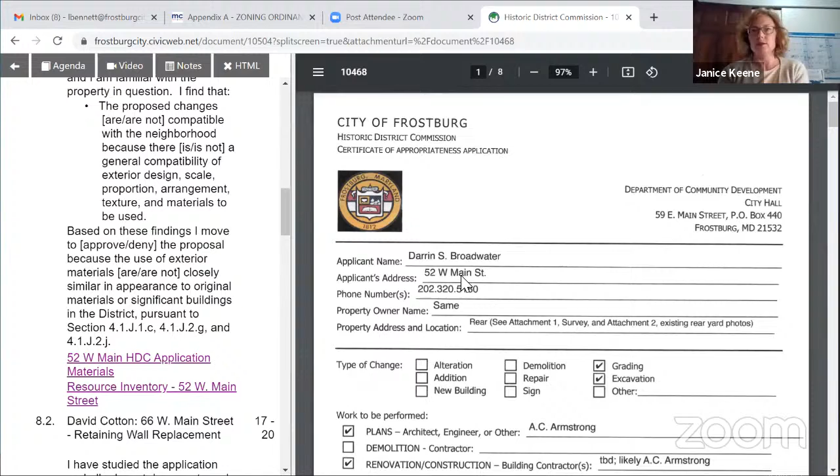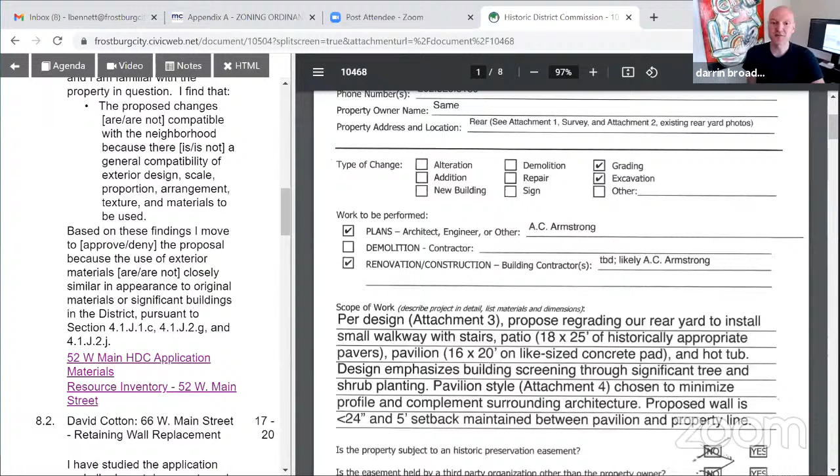Sure. This is my first HDC experience, so I actually didn't prepare anything beyond the package. But I'm happy to walk through and just kind of talk about what we'd like to do and why and how we'd like to do it.

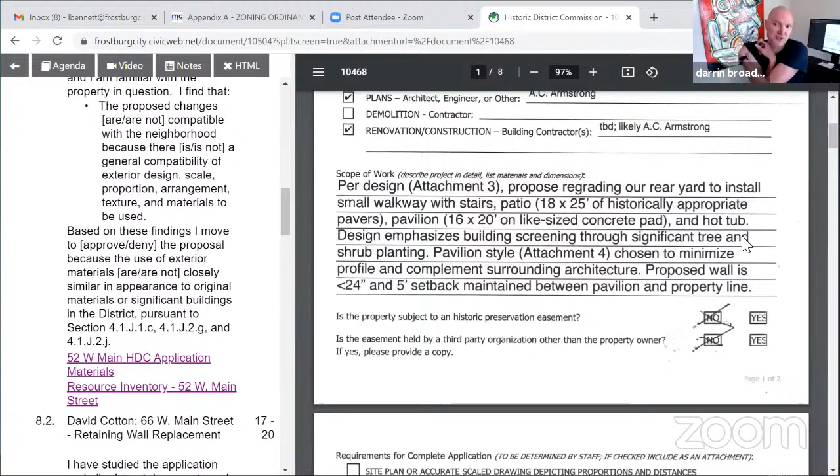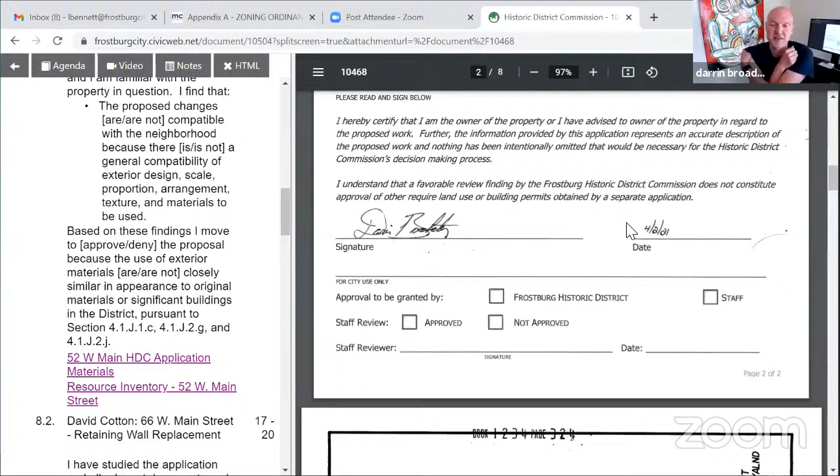So we bought this house, I think, about 3 years ago, and part of the selling point was it's got this great, nice, large backyard. It's fenced in for our dog, which has been lovely. The problem we've been having that we're trying to resolve is there are a couple. We have a lot of western sunlight that comes in the evening, which is great and warm and sunny on a day like this. The problem is it makes it kind of unusable in the summertime because there are a few mature trees, but they're not really in a place where we can benefit from the shade from them. So the intention here was to create a small patio kind of place where we could spend some time.

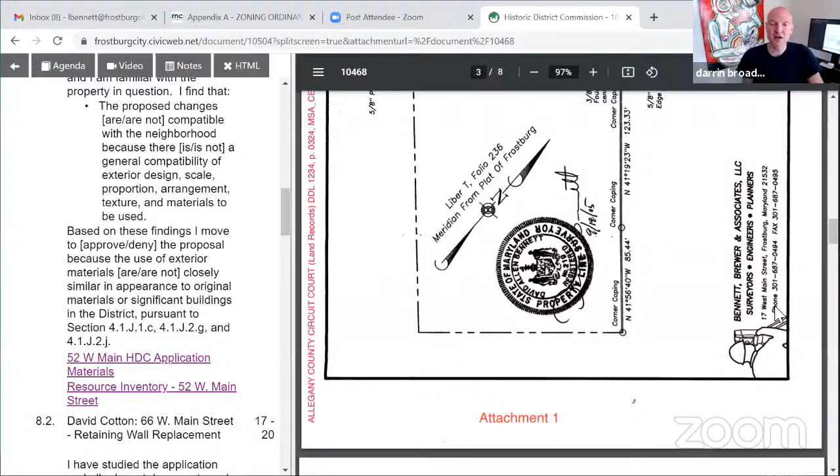In addition, we'd also like a kind of gazebo type area where we can get out of the sun when it's still out. And then, when it rains, we could be there too. Essentially, we want to do this in a way that is compatible and not overbearing for our neighbors.

We have neighbors on Mechanic Street, kind of right behind us - we're on Main Street, of course. Right behind us from Mechanic Street, we have neighbors whose houses are immediately on the road, so they look into our backyard. So we're hoping to get some screening here too, some screening trees.

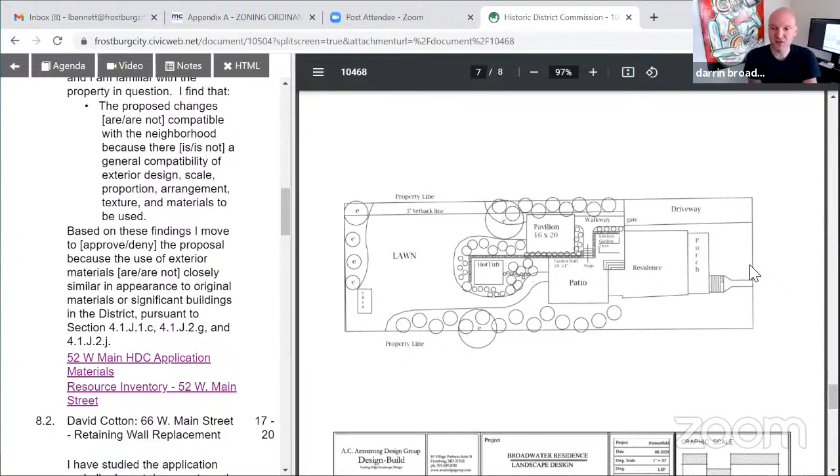I was a little intimidated by this process, so early on I brought in a designer to help us lay out our thoughts for what we're trying to do, and to get it down on paper and benefit from her take on it as well. That's included in the package, and that probably gives a much better idea of what we'd like to do than I could stand here and tell you in my words. So I'm happy to talk about any of the plans, if you have questions or elaborations you'd like on what we've submitted, but I think that's probably a better description than I'd be able to give you now.

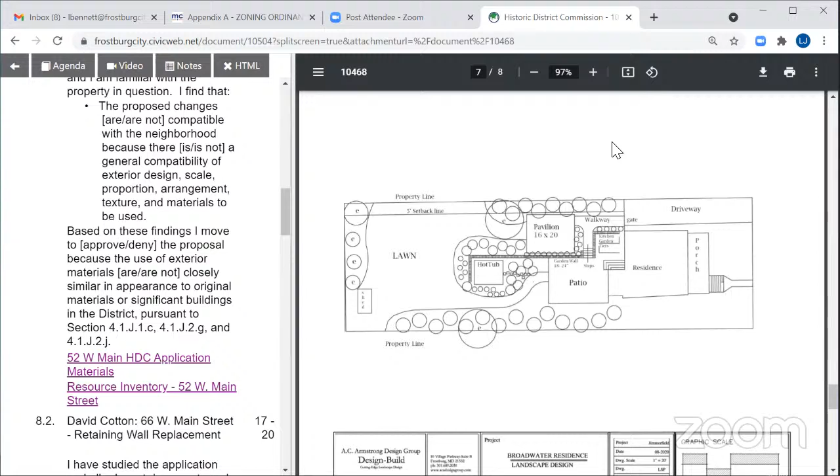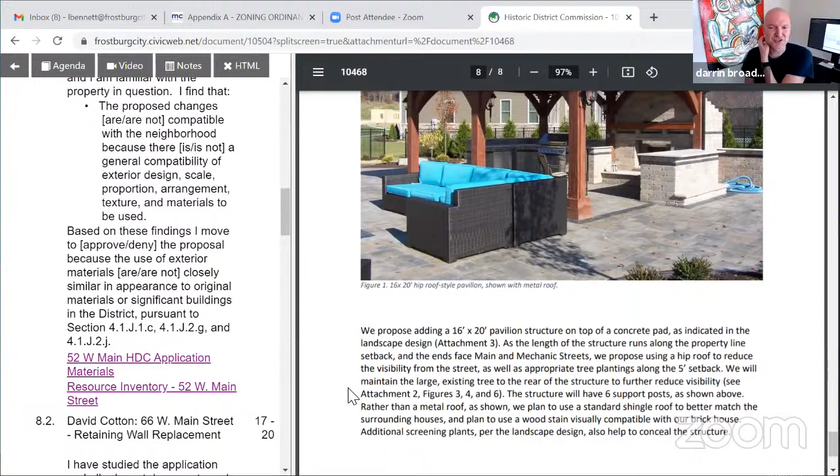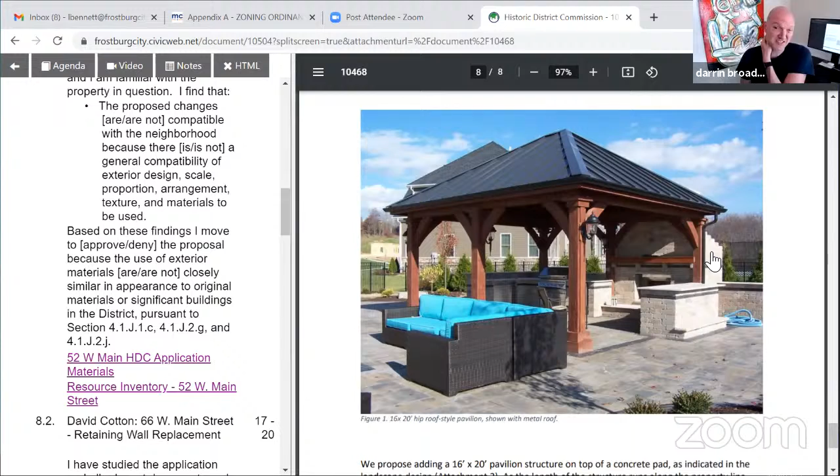The pavilion is essentially a model of the size that we're going for. As I note in the write-up, we'd like to do a shingle roof to be consistent with the house and the surrounding houses. The idea with the pavilion is we could just have one brought in, one that's compatible, so that's something we'll be ordering, and there is some customization there. Any of these design details are negotiable, so give some suggestions on what might be appropriate. Certainly open to hearing them.

So the question that I have is, the pavilion is not actually connected to the house in any way. Is that correct? That's correct.

As far as the patio, are there already stairs down off toward the residence, or would you have to build it? Yeah, there are two stairways in that plan. The stairs adjacent to the residence are existing currently. The steps between the patio and the walkway are proposed.

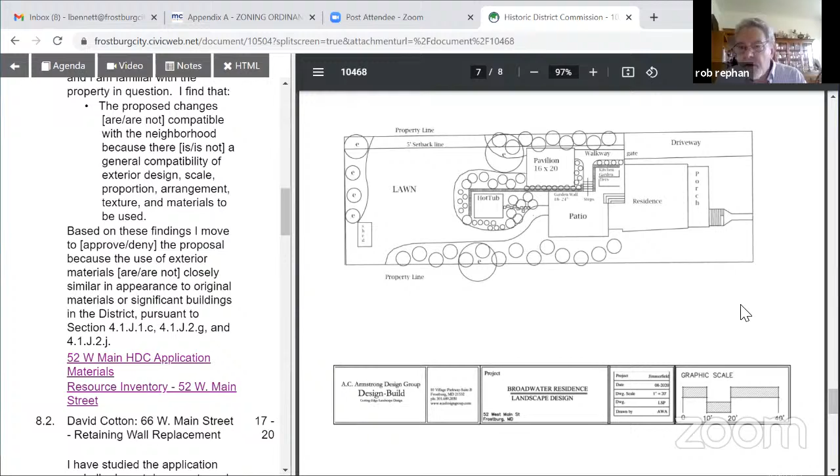And then where does that elevation come from for the walkway down to the patio? It's hard to tell in the plan, but there is a natural incline on the driveway adjacent to Sowers Funeral Home parking lot. That whole top of the page there, that property line is parking lot, and it's a little bit higher. You can kind of see the elevation right there.

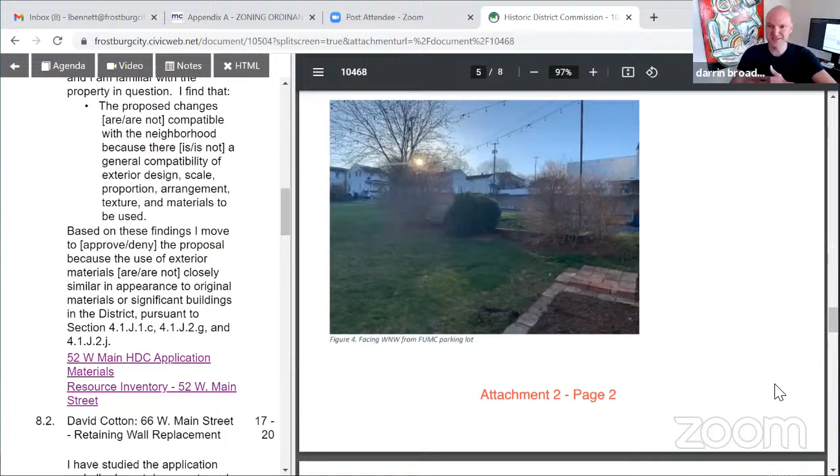So essentially we're trying to grade it so that both the lower and the upper part are level. But in doing that, we have to accommodate the incline and the grade. So the wall is splitting the difference, making a level upper part, a level lower part, and then the grade difference with the wall.

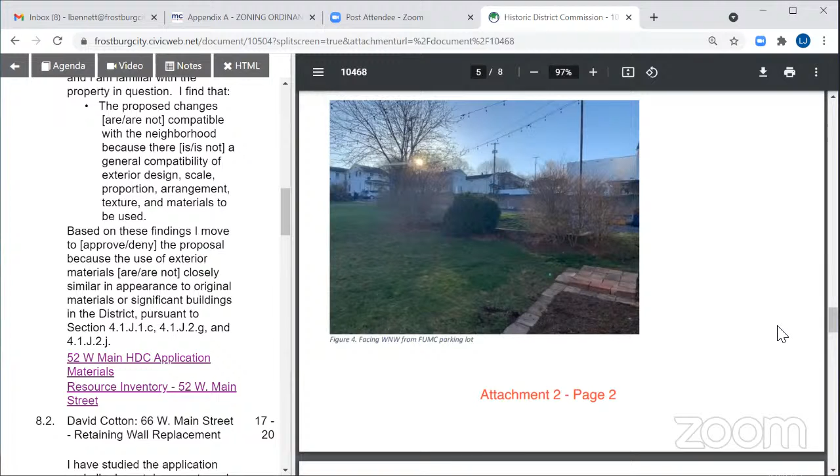Rob, if you take a look at figure 5, I think that's the steps you're referring to, right there. Oh okay, I think those are the ones. So it'd only be a step or two from that one.

Is there already a fence up around your property? Did you say that? There is a fence now, yes.

Let me see if I can find one of the pictures where you can see it best. In attachment 2, page 1, you can see the top of the fence right there. The front of the house has a bit of a wrought iron fence, but that's just things he's pieced together. The bulk of the yard is, I don't know, but it's like a wire fence with posts on it. And I think that was the fellow that had the house before us, Gary Ritchie, who you guys may have some experience with.

All right, are there any other questions from commissioners?

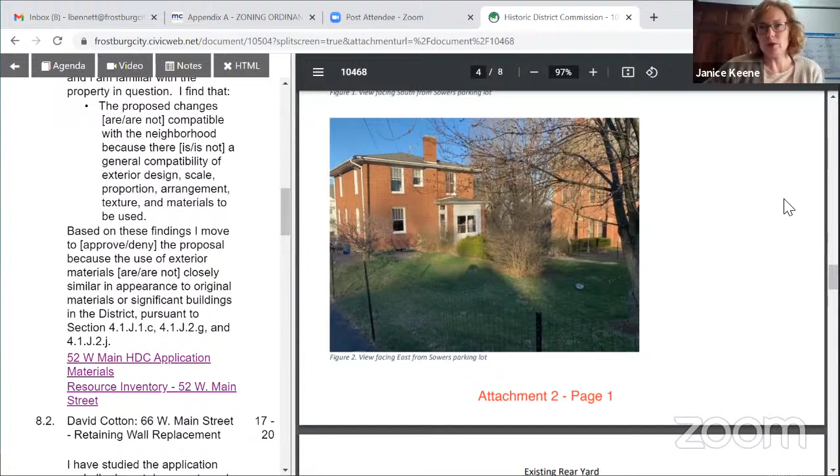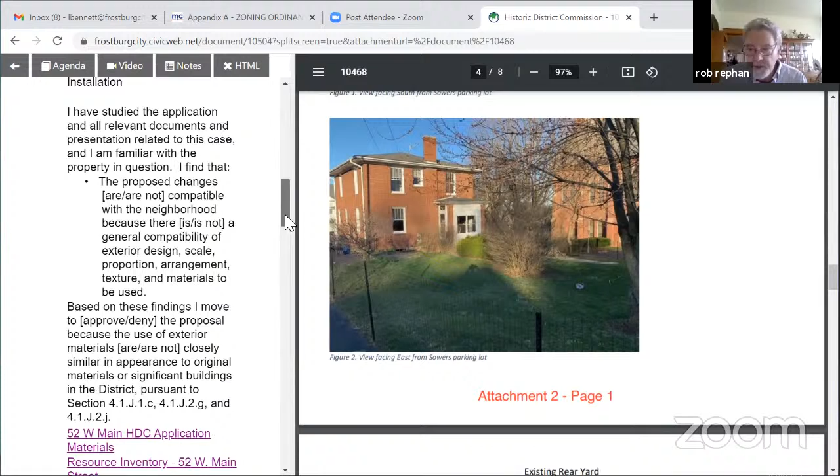Did you say you're going to keep that fence or replace it, the one up towards ours? I didn't say, but it stays. We're not looking to expand. I haven't gotten the estimate yet exactly, but I think we're in for enough money on the project as it stands. I'm not looking to expand the scope at all. I didn't see that, but I just thought maybe I missed it.

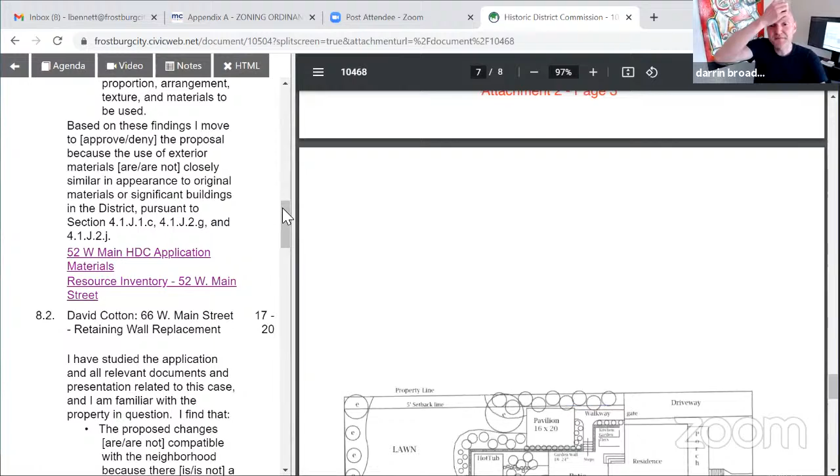What's your plan for privacy? Are you doing trees, shrubs? Yes, primarily shrubs. If you look back at the plan, we've got placeholders for the plants down, and I think they're within a ballpark estimate of what we ultimately intend to do. We've not gotten down to the level of a per-plant decision. But the ones with an E are existing, and the ones without an E would be new plants. So probably some form of shrub, bush, tree, something that looks nice that the landscaper recommends, hopefully a bit of a barrier.

All right, do we have any public questions or comments? No, Chair Hein, public comment was open until 4 p.m. today. And we haven't had any comment. All right, thank you.

All right, if there is no further discussion, can I have a motion, please?

This is Maureen Brewer. I'll make a motion. I have studied the application and all relevant documents and presentation related to this case, and I'm familiar with the property in question. I find that the proposed changes are compatible with the neighborhood because there's a general compatibility of exterior design, scale, proportion, arrangement, texture, and materials to be used. Based on these findings, I move to approve the proposal as use of exterior materials closely or similar in appearance to original materials or significant buildings in the district pursuant to section 4-1-J-1C and 4-1J2G and 4-1-J-2, that's J, the little J.

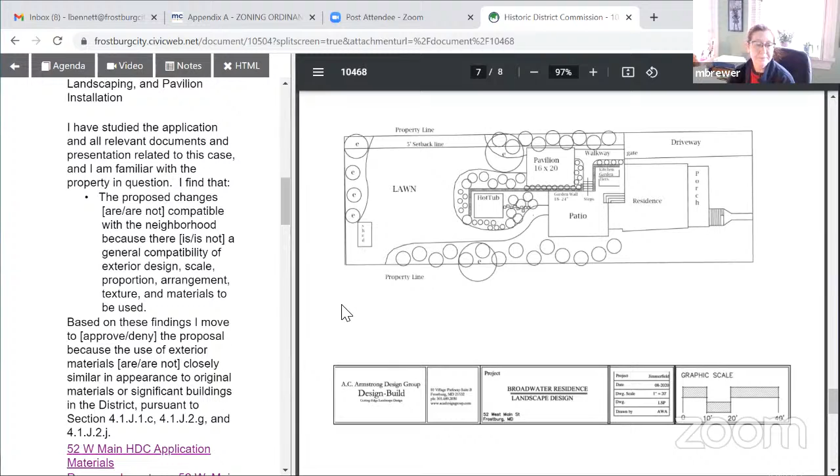I second that motion. Bill Determan.

All right, having a motion and a second. Is there any further discussion? All right, all in favor, please say aye. Aye, aye. All right, hearing none opposed, your project has passed.

Great. Thank you all for your time. I appreciate your help. Thank you. Thank you, good luck, good luck. Thank you very much, Mr. Broadwater. We'll be in touch.

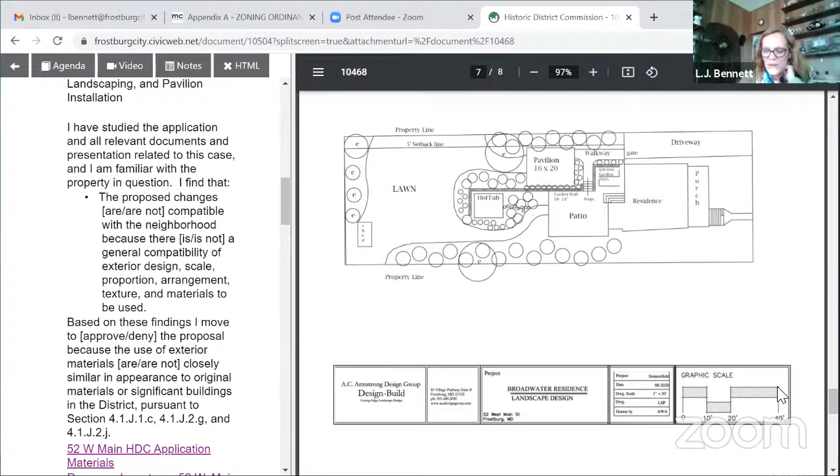All right, our next project is David Cotton, 66 West Main Street, retaining wall replacement.

Yeah, so hi, good evening, everyone. Hello, hi, I may have a little lag here. I don't know, but you're freezing and coming up. So hopefully this works flawlessly right now that I'm speaking.

I'm sure it won't, but anyway, this is the second major renovation we've probably attempted in the last 3 years. The first was the rebuilding of the porch, which we came to you for and did receive approval.

This is for the replacement of the existing wall, and it runs on the side of the house. It's approximately 70 feet long. 53 feet of that 70 foot long wall is 30 inches high, and 17 feet of it is 40 inches high. So we're right in the middle of having a wall that is fairly significant in order to hold the property landscaping back on the upper side of the property, which is 68 West Main.

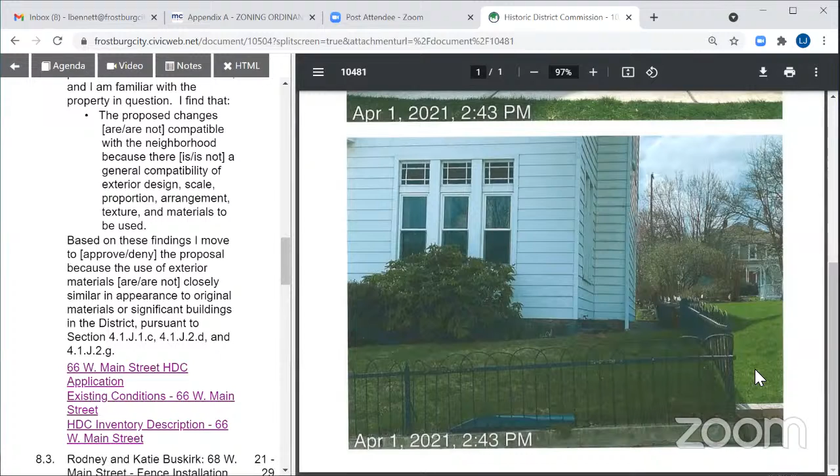So I'm still a little confused - does that mean that if they're deteriorated to a point, you will not replace them? No, Bill, the entire wrought iron fence will remain. There are 2 little pieces where they come together closer - if someone could maybe put the cursor over one in the front, where they come together closer and they cross.

Those two pieces way up at the very, very edge of the house near the cement - those two little tiny pieces are embedded in the concrete. Just don't know. I mean, the rest of the wall was full of rebar. The back wall fell 2 years ago, and all that rebar was totally deteriorated. So it just depends. We're not taking that wrought iron down - the wrought iron will stay. We just may lose those two little loopy sections at the one end, and that's it.

So just to be clear, the wall being replaced is along the side of the house or along the front as well? There's no wall on the front. It's all on the side. If I could share my screen, I have pictures.

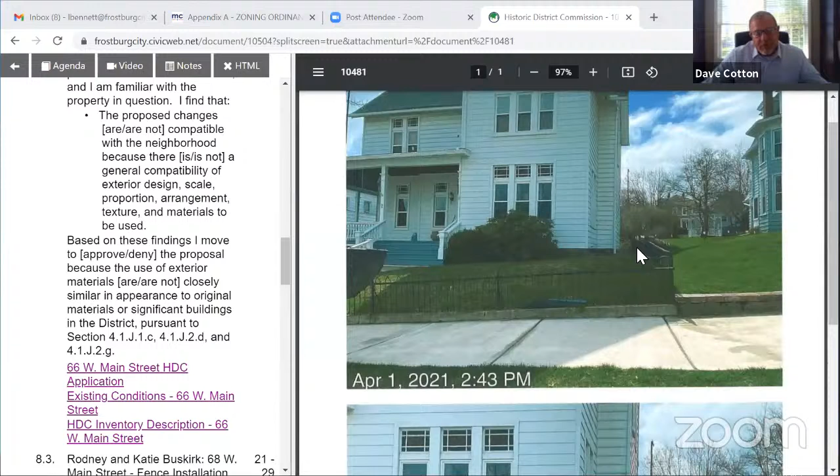This is the best close-up that shows it right here. Unfortunately, it is kind of in the shadow. This farther back view, you can see the bulk of the wall. It's not truly visible from Main Street. A corner of it is.

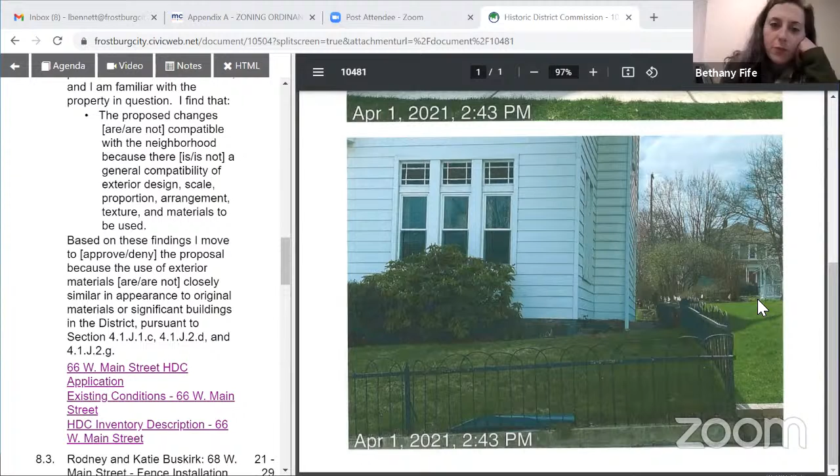The majority, you would have to actually stand in front of it to see it, because that walkway is only 3 feet wide and then it goes to 4.5. LJ, if you zoom that bottom photo at 200%, you can get a pretty good view of that section we're talking about right now.

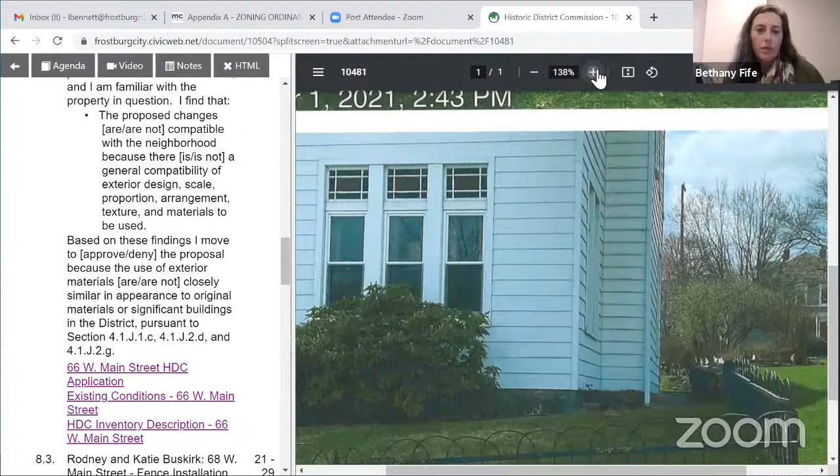Yeah, if we don't do something, it will fall. It's just a matter of whether it's concrete or block. Is that a little better view? Yeah, I think so.

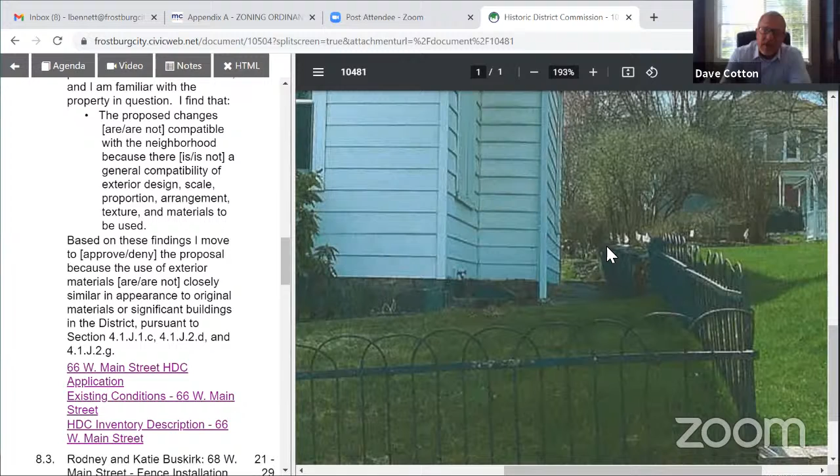Can you put the cursor where the wall starts, I mean the top of the wall? I can't tell. Right here. Oh, okay, it's up that high. Yeah, that's 30 inches, and then it goes back to 40. Got it.

All right commissioners, do you have any further questions for Mr. Cotton? Not for me, no. All right, did we have any public comment? No public comment was received.

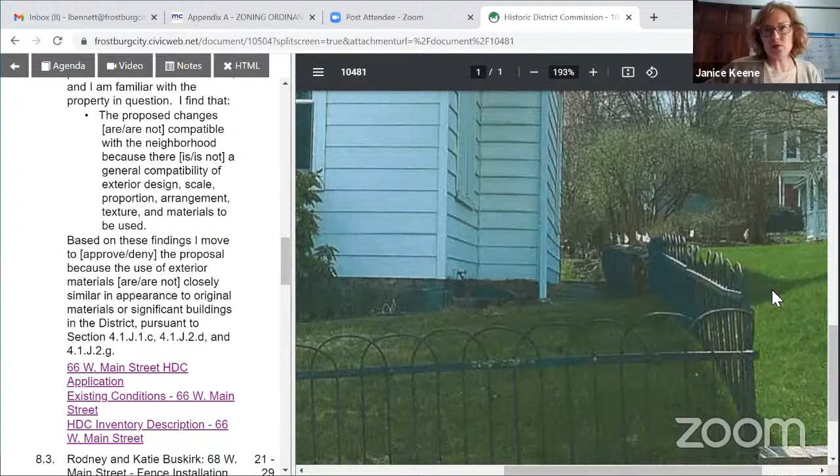All right commissioners, can I have a motion please? I'll make a motion, Rob Rephan. I studied the relevant application and documents and presentation related to the case, and I'm familiar with the property in question. I find the proposed changes are compatible with the neighborhood because there's a general compatibility of exterior design, scale, proportion, arrangement, texture, and materials to be used. Based on these findings, I move to approve the proposal because the materials are similar to the existing, pursuant to section 4.1.J.1.C, 4.1.J.2.D, and 4.1.J.2.G.

Maureen, I'll second it. All right, having a motion and a second, all in favor please say aye. Aye. Hearing none opposed, motion passes.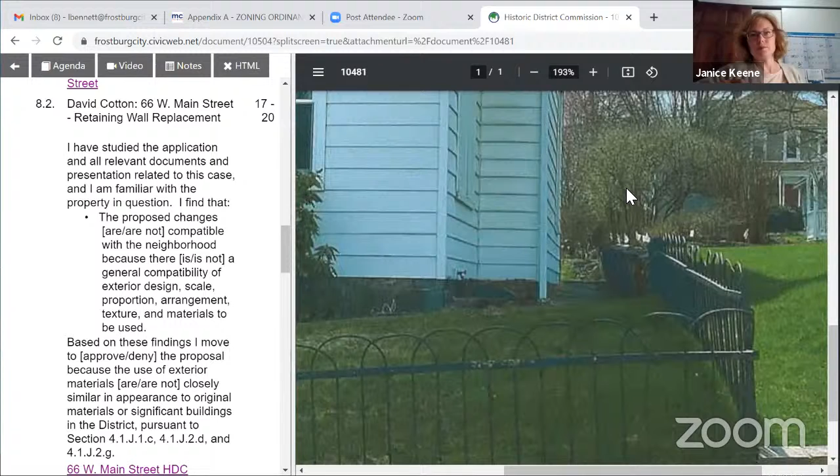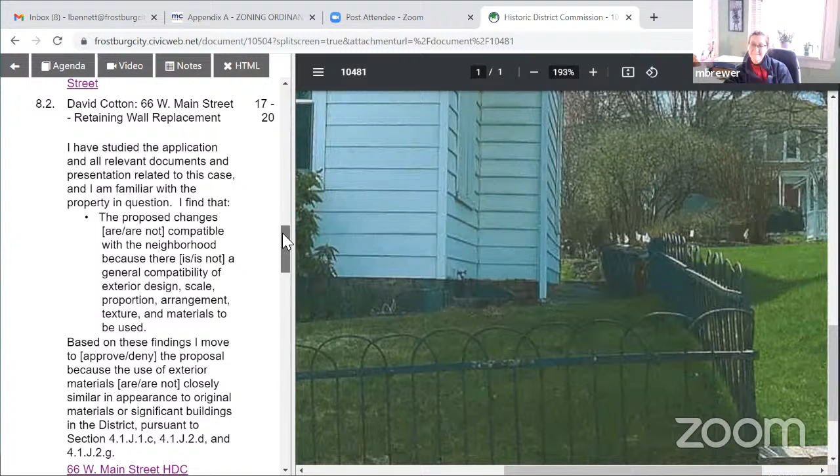All right, our next presentation is Rodney and Katie Buskirk, 68 West Main Street, fence installation.

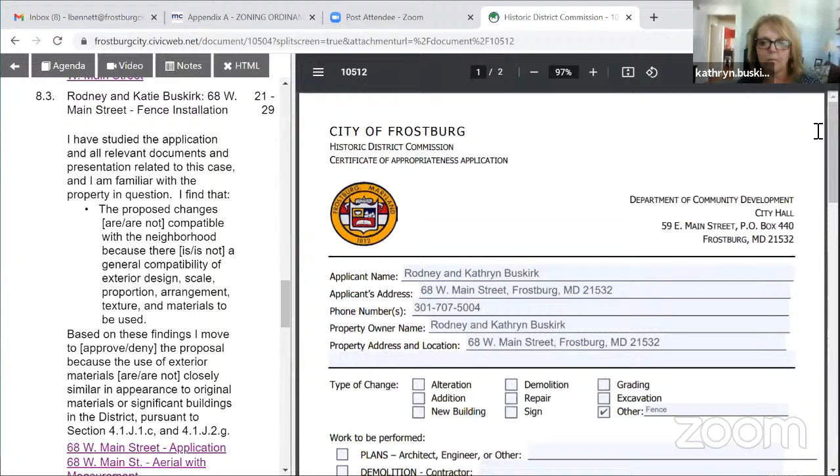Good evening everyone, can you hear me? Okay, yes, thank you. We are proposing the installation of a fence that will go across our property between our house and the house next door, 66. Attached are the construction design pictures for the fence. It is vinyl, only 4 feet, a picket style that is tongue and groove put together with posts and supporting posts across the top and bottom. We are also adding a gate.

We primarily need it for safety. We have grandchildren now that are out toddling around the yard, and we also have pets, so having a barrier there with the traffic on Main Street has become essential.

In addition, one picture that was inserted was an aerial view with measurement. The actual fence is back a little further than that, which is recording at 64 feet. When we hand measured it, it was a minimum of 75, from the edge of the curb, but give or take 5 feet, so it could be 75 to 80 feet. So it would be the backyard.

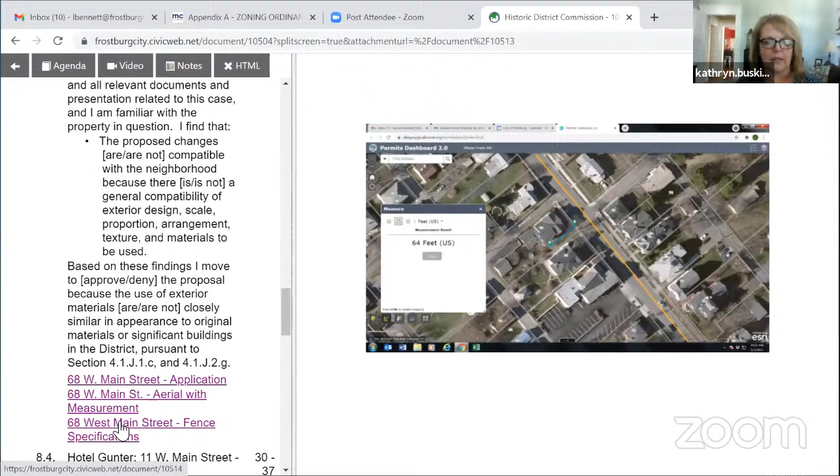There is a partial fence there now. The fence we're creating, which can be seen in a picture drawn in under the fence specs further down, would take it across and then in an L shape, follow the line on our property line and back off of the property next door who are fixing their wall and their back drainage. So it would be offset off the property line for that.

There's a tree, a larger tree and a smaller shrub tree that you can see. They would be in front of the fence. The fence would be behind that tree.

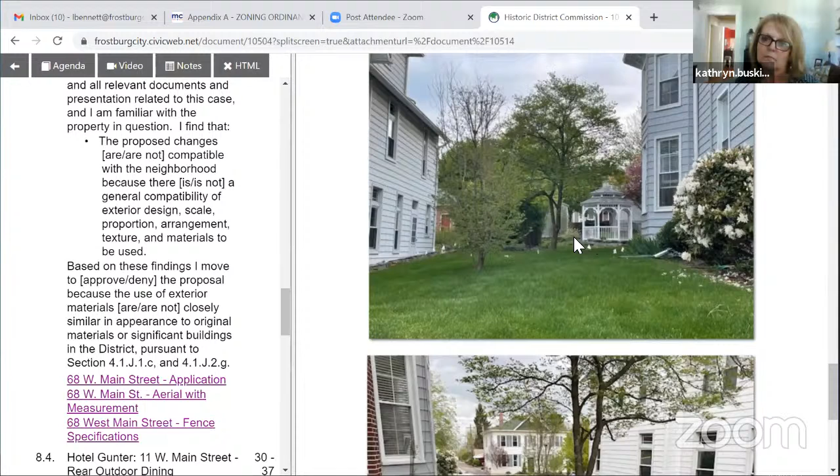Katie, you said 4 feet high? Yes, 4 feet.

Is there any kind of fence in the back that goes along Mechanic Street? Currently there is, and it's 4 feet. And there's a fence along alley 55 that is also 4 feet, sitting on top of a retaining wall, because the elevation of alley 55 is higher than the yard. That's just west of your house? Yes, that's alley 55.

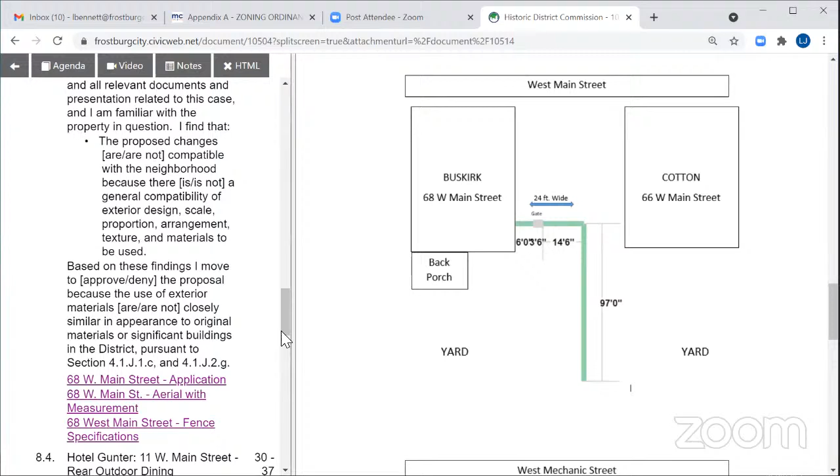All right commissioners, do we have any further questions? Not for me.

Did we have any public comment, LJ? Fortunately we did not. Public comment was open until 4 p.m. today, and we have not received any comment on this application.

All right commissioners, do I have someone ready to make a motion? Bill Determan, I will make the motion. I have studied the application and all relevant documents and presentations related to this case. I am familiar with the property in question. I find that the proposed changes are compatible with the neighborhood due to the general compatibility of the exterior design, scale, proportions, and arrangements. Based on these findings, I move to approve the proposal because the exterior materials used are closely similar in appearance to the original materials of a significant building in the district, pursuant to section 4.1.J.1.c and 4.1.J.2.g.

This is Maureen Brewer, I'll second that. Sorry about that, guys, I don't know what happened, I lost power there for a minute. It's okay, Mrs. Buskirk. Just to recap, Mr. Determan made a motion to approve the application, and Mrs. Brewer seconded that motion for a vote. Okay, thank you. Sure, understand these things happen.

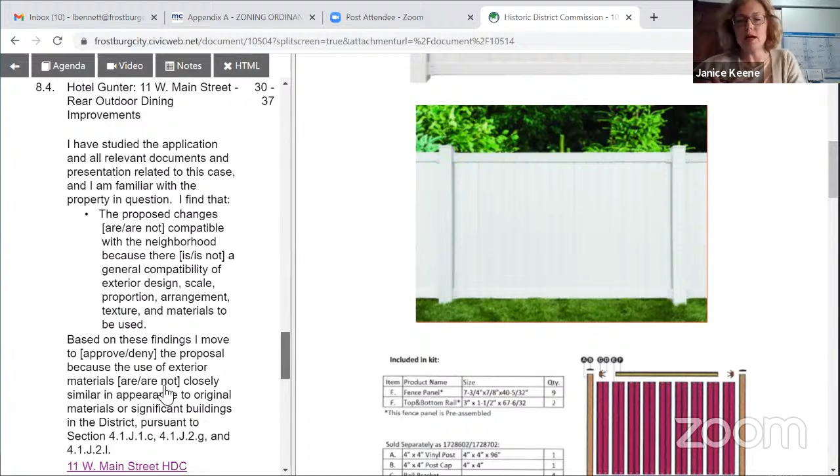All right, our next project is the Hotel Gunter, 11 West Main Street, rear outdoor dining improvements.

Last year we rented a tent and turned one of our parking lots into an outdoor dining area. This year we thought we'd do something a little more permanent. We're currently replacing the paving that was deteriorating with concrete, and we would like to build a pergola above that. It'll measure approximately 35 feet by 70 feet, attached to the existing building out back that currently houses our winery, brewery and distillery. It'll have a metal roof, lighting underneath, and be set up similar to last year with the tent there.

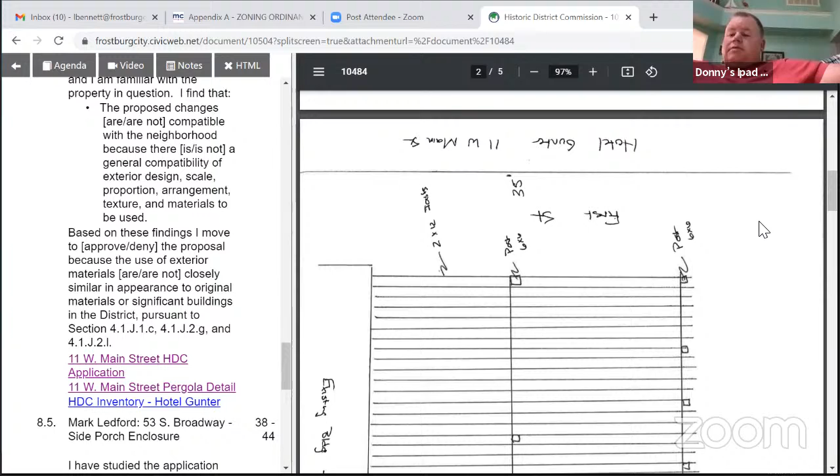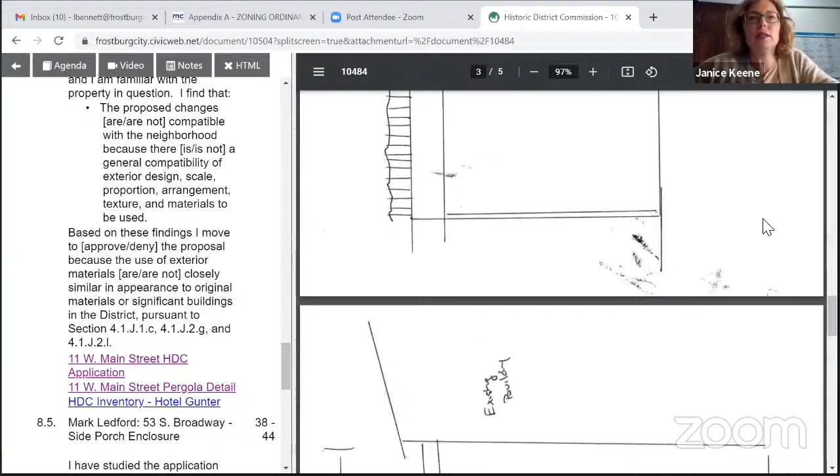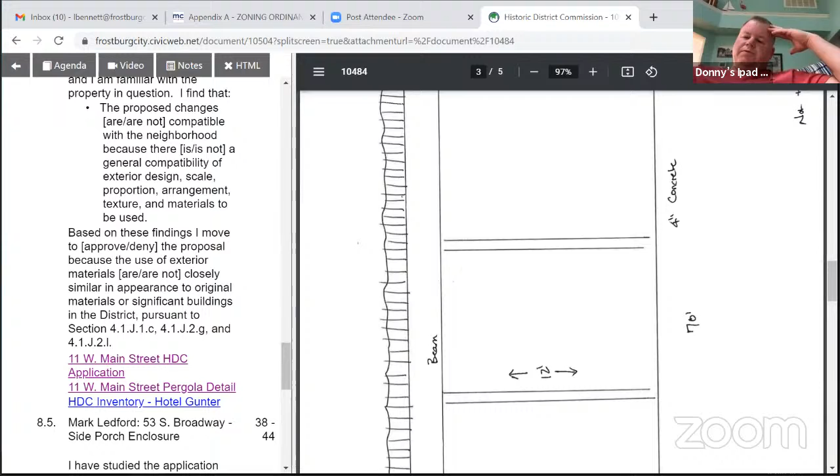So the drawing we're looking at currently, is that for the concrete you were referring to? Yes, that's the bottom, a cross section showing the concrete with a couple posts going up. You're looking at it sideways, that's the issue. To the left of that photo would be where the roof line is with the beam. There'll be several posts across there to support the beam.

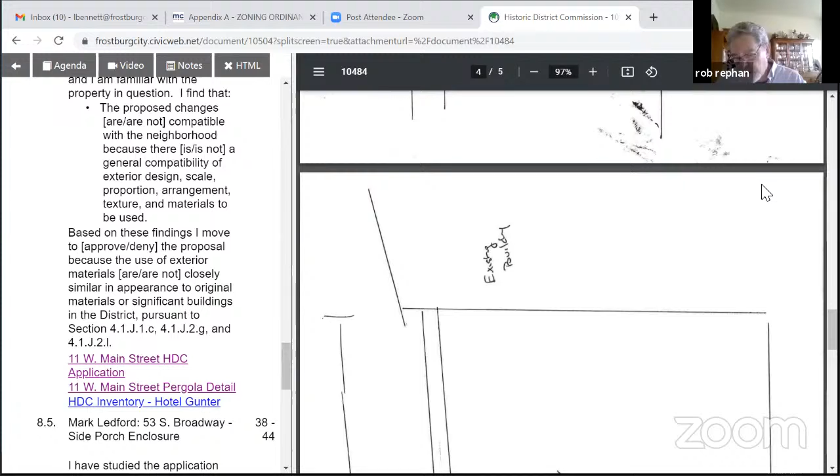Will the pergola run the whole length of that building then? Yeah, all but like 2 feet. So it'll cover that smaller door closer to the alley. They'll cover all the doors, the garage doors and everything. It'll be above them.

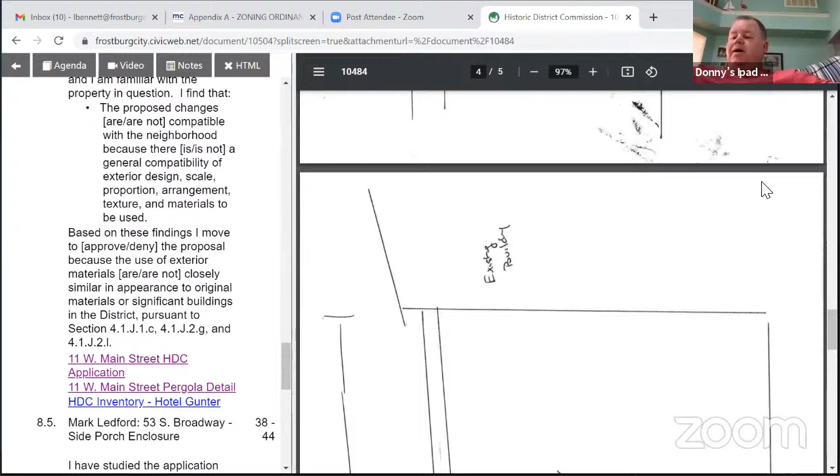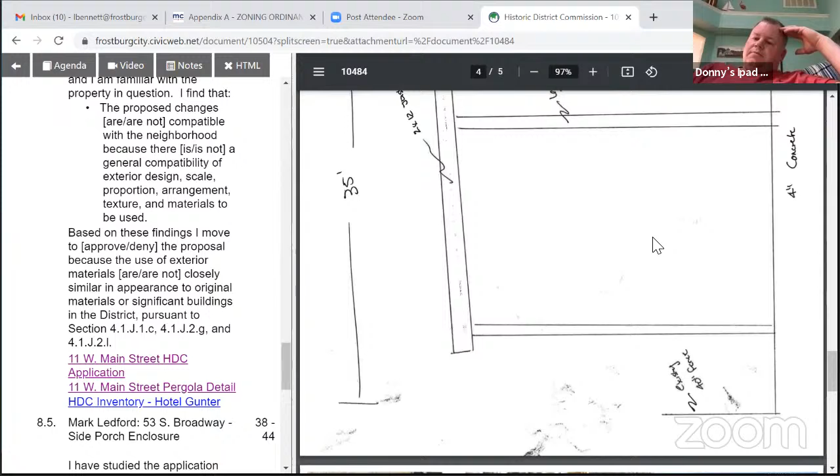Is the pergola going to be made of wood? Yes, it'll have a metal roof. We'd like to do galvanized if we can find it.

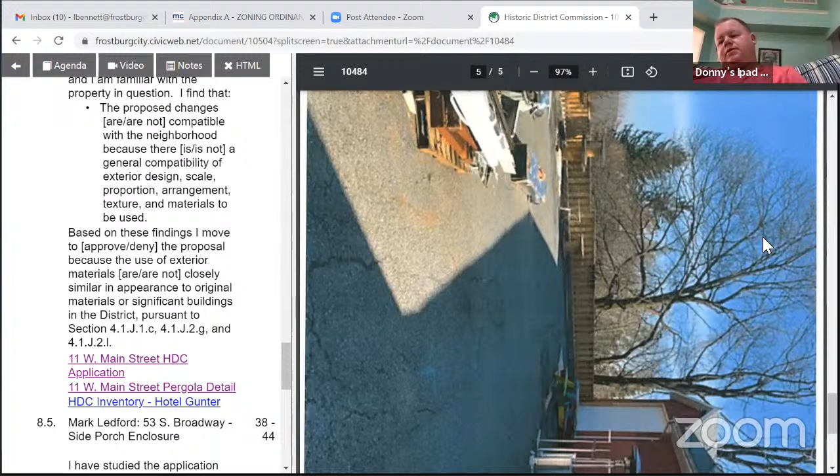Construction materials right now are pretty hard to come by. Last year we had a fence around the whole thing, and that fence will still stay there. It's down right now, but it'll be built back like that. The roof line will come out right underneath the roof line you can kind of see down a bit, LJ, right there.

And you said it would be 35 feet out from the building? Yeah, approximately. Will that be about where the other fence was then? Yeah, it'll cover the whole paved area.

So is the metal roof going to be a flat roof? It'll be pitched slightly, enough for runoff, like a 2-12 pitch probably, or a 3-12. It goes from the building - we have about 11 feet, and then it'll go down to probably 9 feet at the far end.

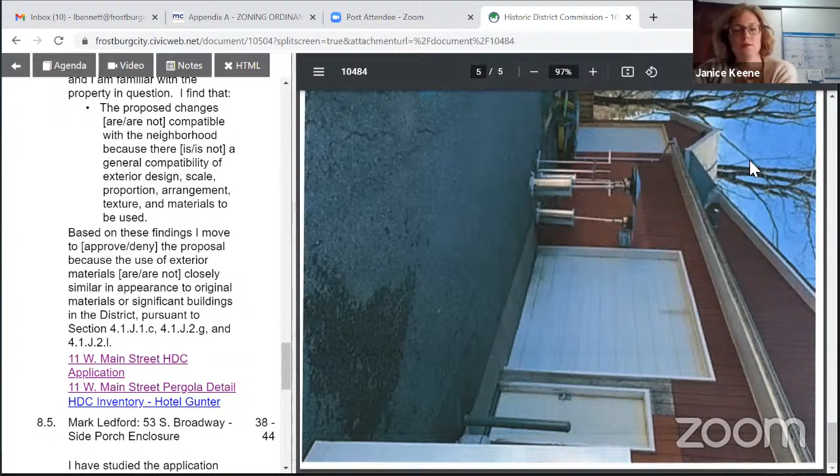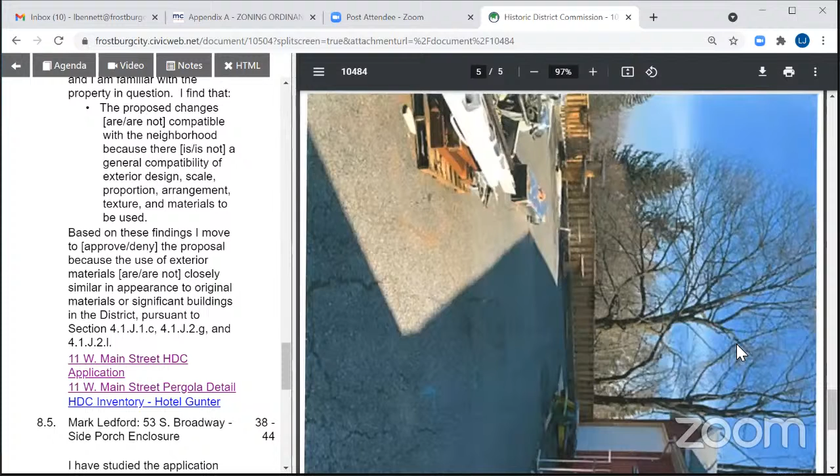Hey Bill, you can see in the drawing right above this picture how the roof is going to look. Oh, I see it, yeah, I didn't see it before. Thanks, Maureen. Oh yes, okay.

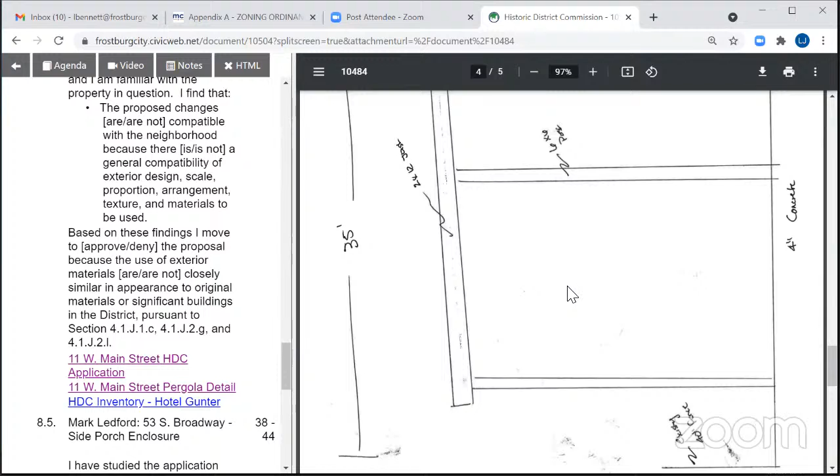All right commissioners, do we have any other comments or questions? Not for me. All right LJ, did we have any public comment? No chair, we had no public comment for this application.

All right commissioners, can I have a motion please? This is Maureen Brewer, I'll make a motion. I have studied the application and all relevant documents and presentation related to this case, and I'm familiar with the property in question. I find that the proposed changes are compatible with the neighborhood because there is a general compatibility of exterior design, scale, proportion, arrangement, texture, and materials to be used. Based on these findings, I move to approve the proposal because the use of exterior materials are closely similar in appearance to original materials or significant buildings in the district, pursuant to section 4-1-J-1C, 4-1-J-2-G, and 4-1-J-2-L.

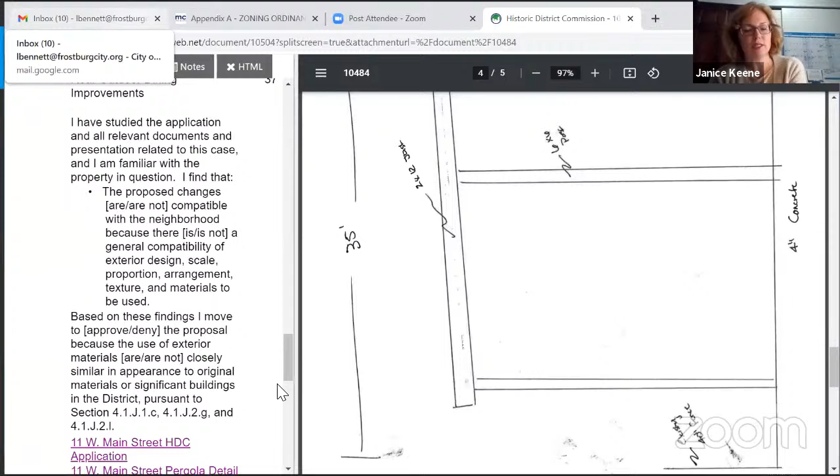All right, our next presentation is Mark Ledford, 53 South Broadway, side porch enclosure. Good evening, can everyone hear me okay? Yes, yes, yes.

I'm proposing putting an addition on the side porch of the 53 Broadway house. Currently there's a porch there that doesn't really fit with my plans. It's a rental property, and I'm looking to put a bedroom in there. It'd be an 8 by 12, and it would basically fall right underneath where there's an open area, the porch is.

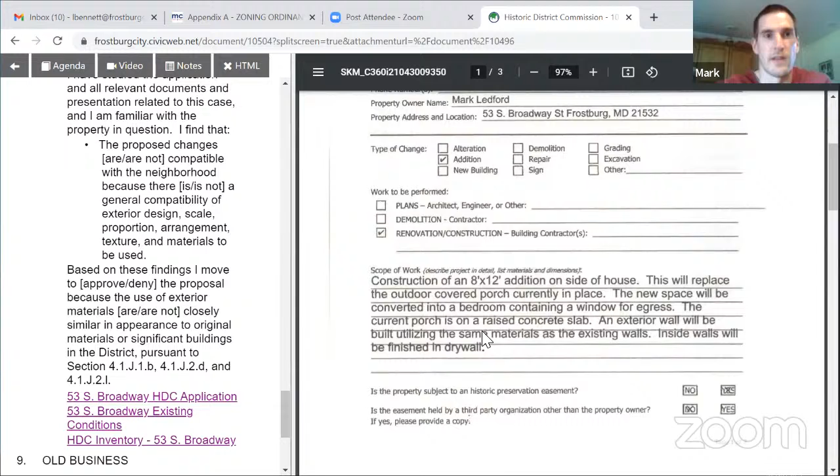If you have the room above there, the wall would fall down there, and on the front of the house you can kind of see where it comes out, near the round shrubs. I'd just be trying to follow that line, it wouldn't stick up past that. There's already a concrete slab there for the porch that extends out 6 feet.

I'd just be looking to extend 2 more feet to meet the side of the house. There's a window on the porch now, with the dining room on the other side. I'd be looking to move that window out to the exterior wall and close it all in. The outside of the building currently has aluminum siding, and I'd probably look to find very similar matching vinyl siding to blend in with it.

The interior would mimic the rest of the house, with drywall in the walls and upgraded electrical. There's also a ramp installed there at some point before I owned the property, which I'll be looking to remove. There's concrete steps there that would no longer serve a purpose, those would be removed as well.

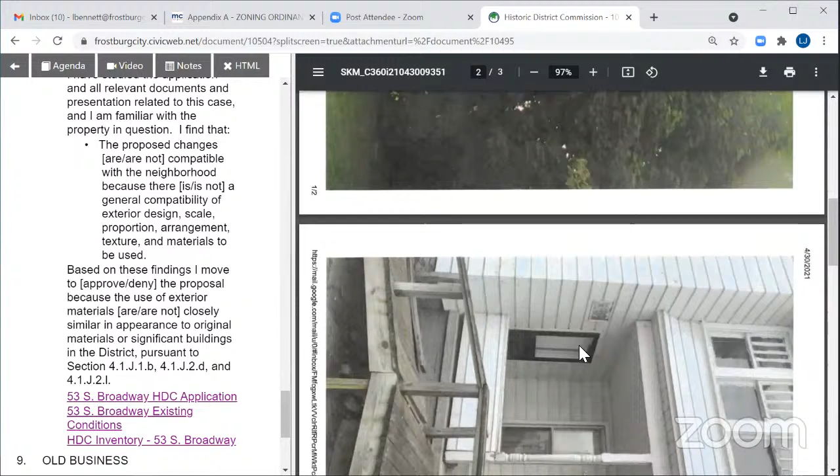I'm trying to orient myself, I did not drive by this property. This is on the side of the house, correct? Correct. Approximately how far setback from the road is that?

The addition part of it? Yeah. Approximately, maybe 30 feet. So it's more than halfway back on the house, definitely. About halfway, yeah, I'd say.

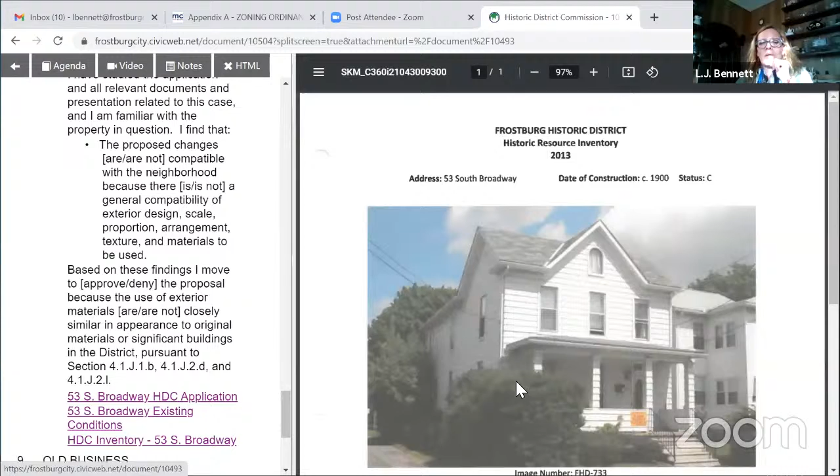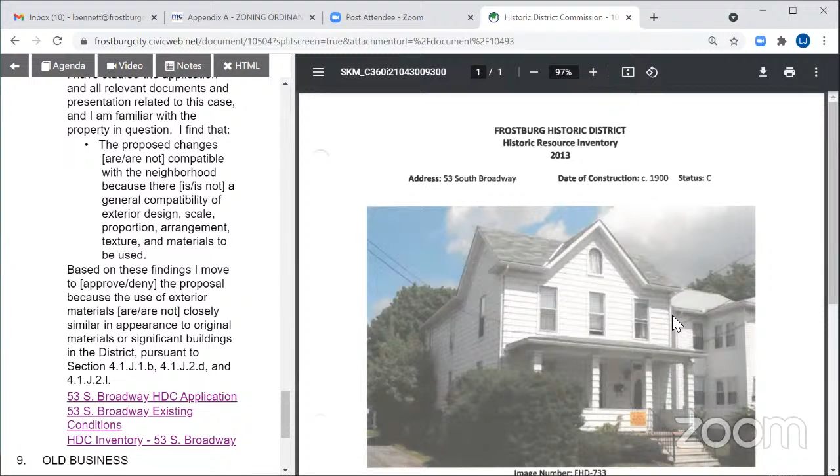Could you go back to that picture from the front? Sure. So you're talking about back to the left on this picture, that's where you're going to close in? No, it'd be on the right-hand side. Oh, okay, wrong angle.

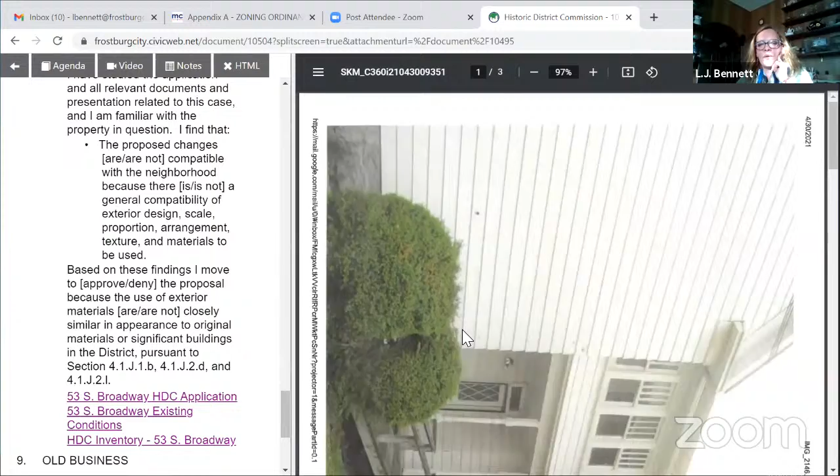So how many bedrooms total will it be if you add another bedroom? It would make it 4 bedrooms. Right now there's 3 upstairs. I was trying to make 2 in the back, but with the layout of the house I can't do it. There's weight bearing walls, chimneys, and things in areas that make it difficult. So downstairs, this would really be the only other place I could feasibly do it.

I was trying to figure out if there was a way to give some indication that the whole side of the house was not flush originally, if there was a way to keep the width you're looking for but indicate in some way, from the outside, that this was an infill. I don't know if that's possible, I'm just kind of throwing that out there.

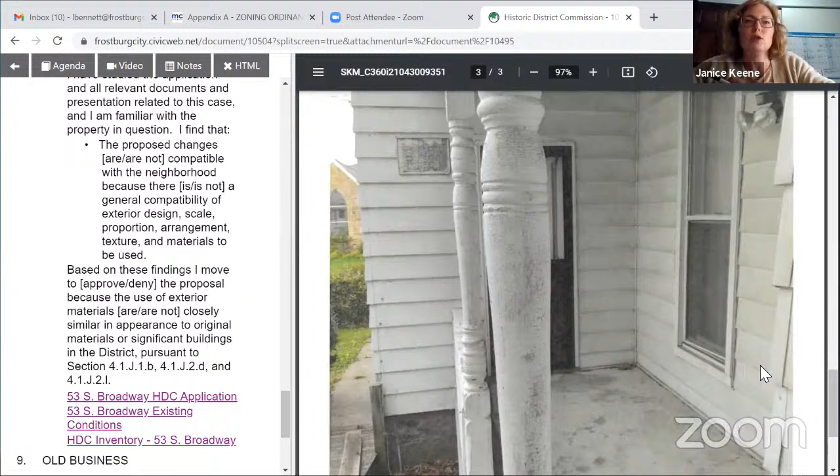Yeah. It's probably going to look different unless you completely reside that side, right? Well, that's what I was thinking, is there going to have to be some transition between the existing siding and the new siding you're going to put up for the new wall?

I guess, yeah, you'd have a break there between the new siding and old siding, as far as putting something there. Probably just be like some vinyl wrap or something, you'll have a separation of a couple inches and then it'll go into the new siding.

Being that the siding's probably a couple decades old, I don't know if I can reasonably find anything that's going to be a close match, with the lines that would match up to that or not.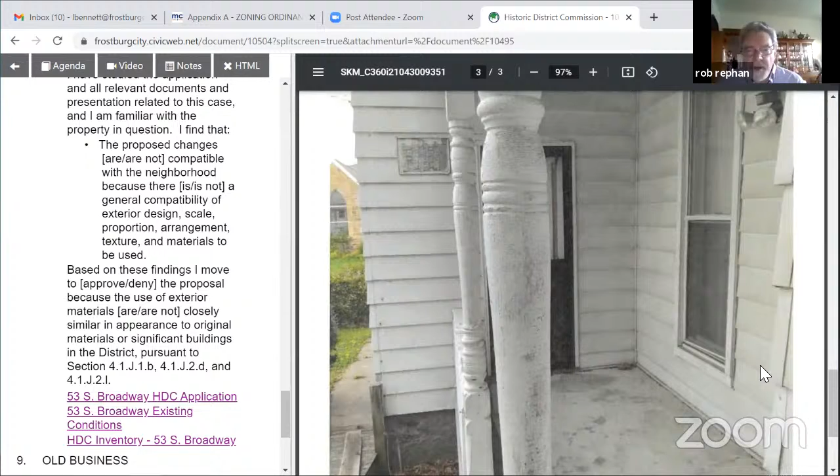Does that rent out as a single house, or how does it rent out? It could have been before I had it, I'm not 100% sure. It's kind of laid out like it was a single house, but it had some shared common areas based on how some doors were bolted off and so forth. It currently has one kitchen and one full bathroom. I'm looking to do some more renovations inside the house as well.

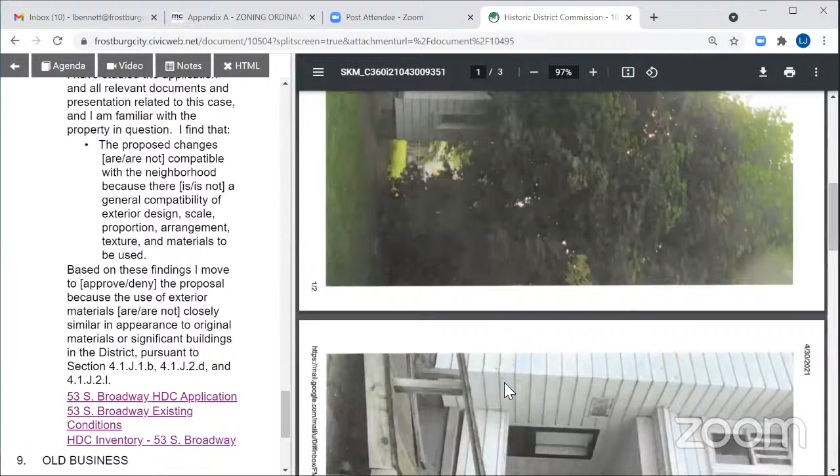LJ, can you go back to the full side view picture? That one? Yeah, that one.

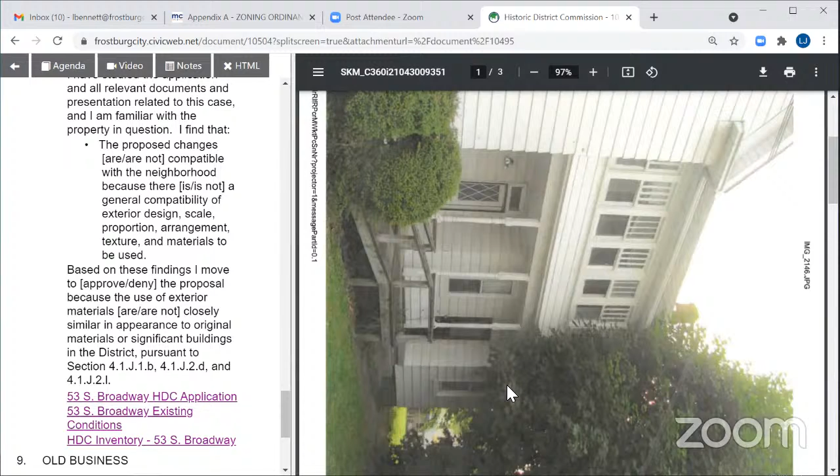So if you look at that picture, it would extend out to that middle post, the second post there on the porch. There's another area past that that'll probably just be left as is for now. That's the main door there that goes to the basement. There's a lot in a small area.

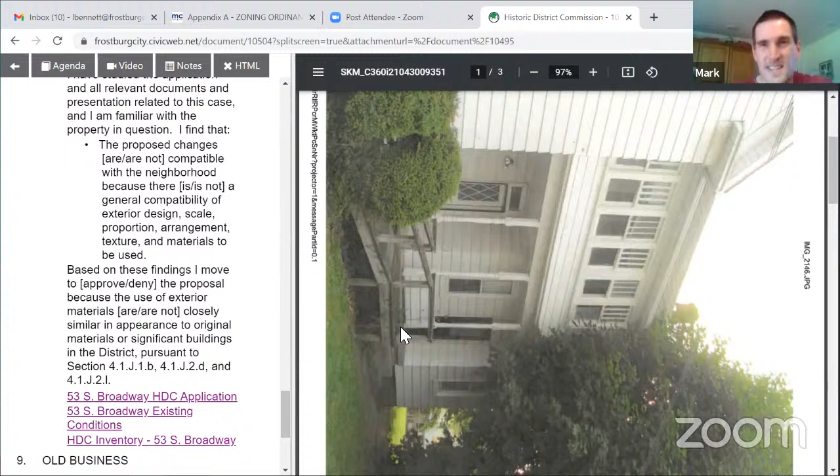So you're not going to enclose the whole width there? You're going to leave a space to still access that door? I think I want to leave that other part.

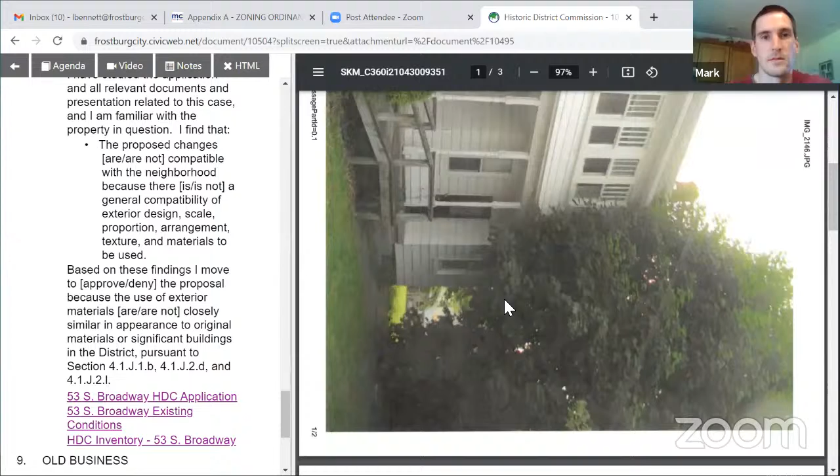LJ, switch to the close-up of the section, please. Yeah.

So the room's going to be 8 foot by 10 foot? Is that what you're saying? 12 foot by 12 foot. We're looking at that second pole now. That's where it's going to end, and then there's still going to be a recess to access the door to the basement. Yes, so in that view there, I think I'll just leave that and just this portion here.

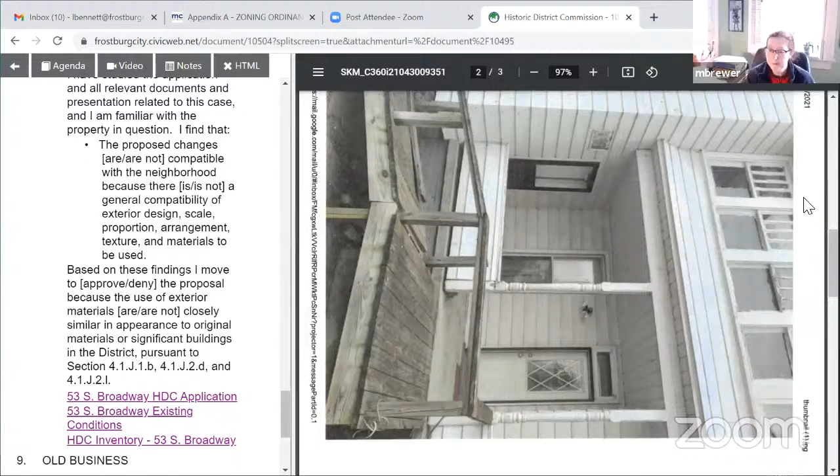Well, there's going to have to be some kind of transition, that's for sure. Yeah, right, I agree. That was kind of my hang-up—I don't think the vinyl and the aluminum are going to match since the aluminum is so much older than what the new materials will be. I think having that transition will actually look much better and look like it's on purpose, and it might help clean up where the two come together and create a barrier between the two different sidings.

All right, are there any further questions, commissioners? All right, do we have any public comment, LJ? No public comment was received on this application. All right, are you ready to make a motion, commissioners?

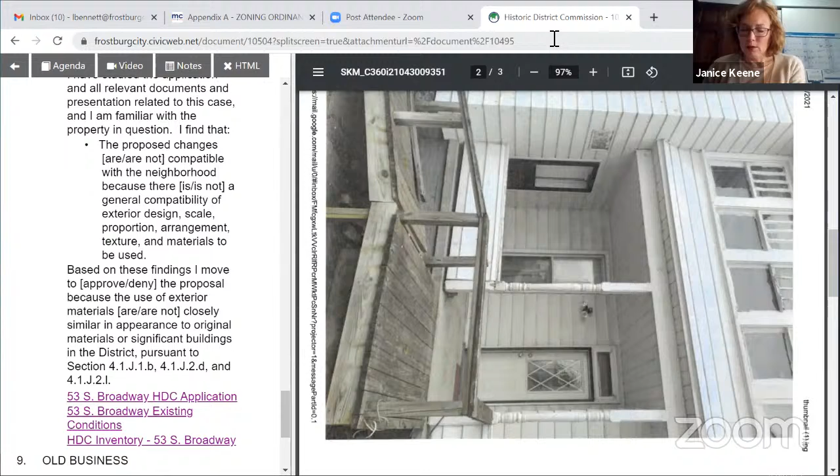Yeah, I'll make a motion. Rob Rephan. I've studied the application and all relevant documents and presentation related to this case. I'm familiar with the property in question. I find that the proposed changes are compatible with the neighborhood because there is a general compatibility of design, scale, proportion, arrangement, texture, and materials. Based on these findings, I move to approve the proposal because the use of exterior materials are closely similar in appearance to original or significant buildings in the district.

Could we make the stipulation that there be a break between the two? You can certainly add a stipulation to your motion. I would move that there be a break between the existing outside and the new addition, a vertical break. Not break, but a covering—what's the right word? Transition. Transition. And that's pursuant to section 4.1.J.1.B and 4.1.J.2.D and 4.1.J.2.l.

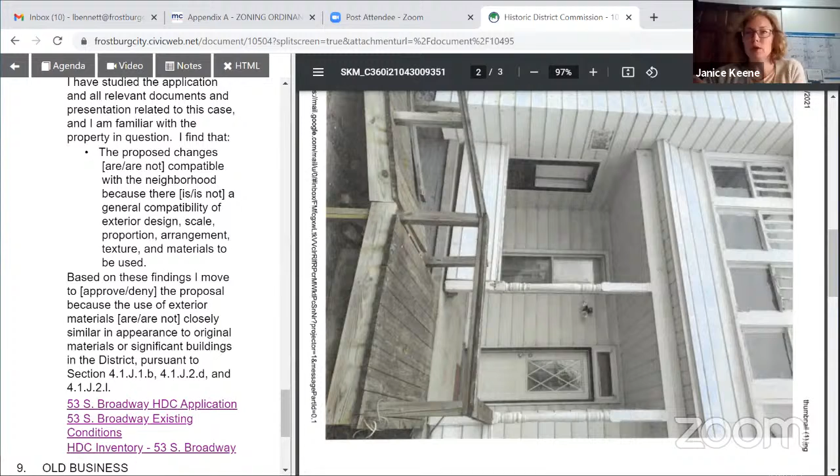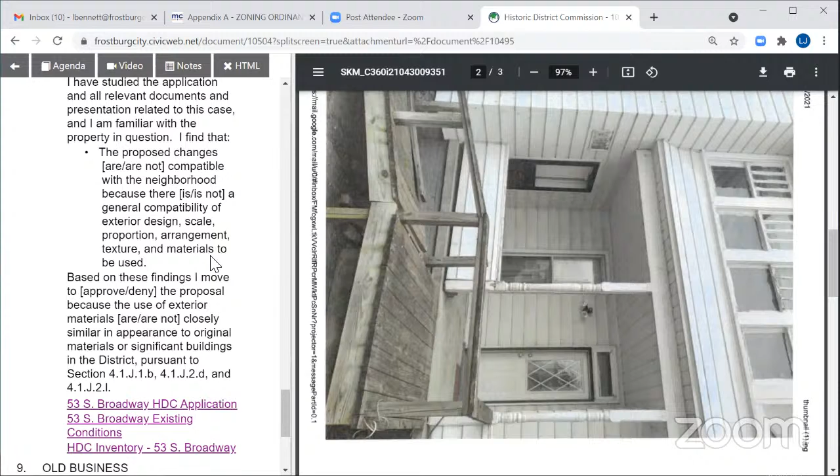All right, I think that is the end of the new presentations for this evening. We do have some old business, the historic preservation contractor list.